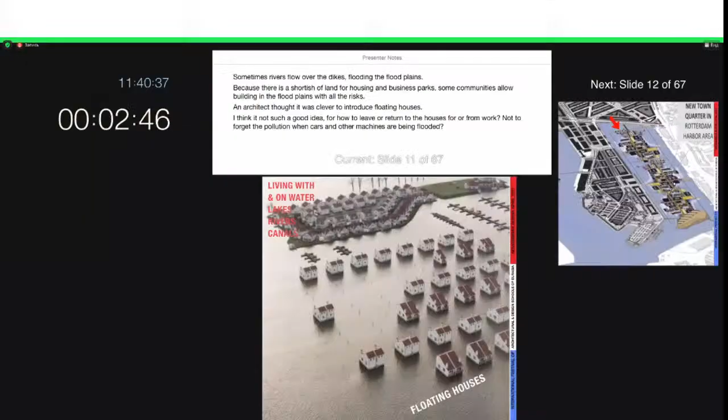They produce floating houses, as you see here below in the picture. I think it's not such a good idea for how to leave or return to the houses for work, and not to forget the pollution when cars and other machines are being flooded.

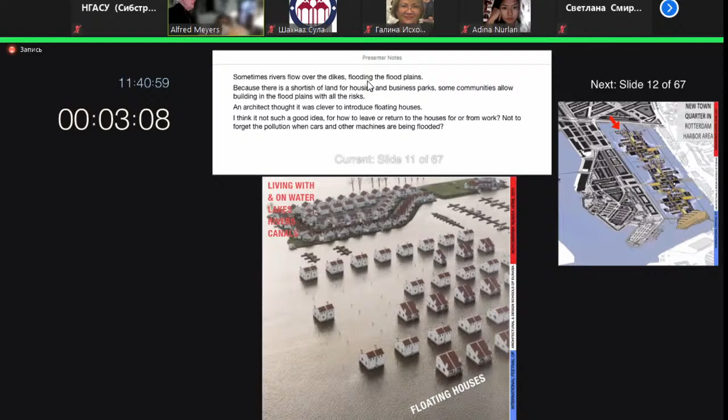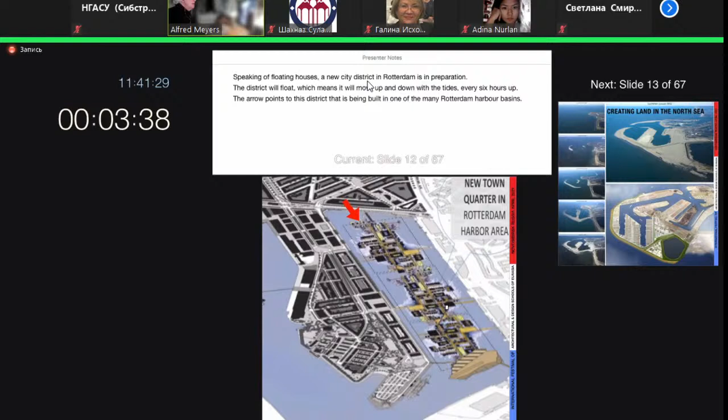Speaking of floating houses, in Rotterdam a new city district is in preparation. This district, about thousands of dwellings and offices, will float, which means it will move up and down with the tides every 6 hours. The arrow points to the district being built in one of the many Rotterdam harbor basins.

The port of Rotterdam was originally located in the center of the city. But because of air pollution and the growing size of cargo ships, the port was moved to the North Sea. New land had to be withdrawn from it, and see the result here. Once people said, God shaped the world, but the Dutch the land.

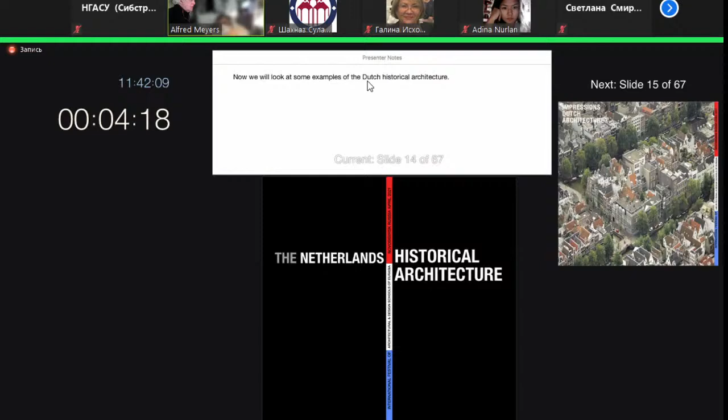Now we look for some examples of Dutch historical architecture. Amsterdam city nowadays is an open-air museum because the Amsterdam Canal District is on UNESCO's World Heritage List. These old buildings date from the 17th and 18th century, when the Dutch were a world power and became very, very rich. These dwellings were built by rich merchants.

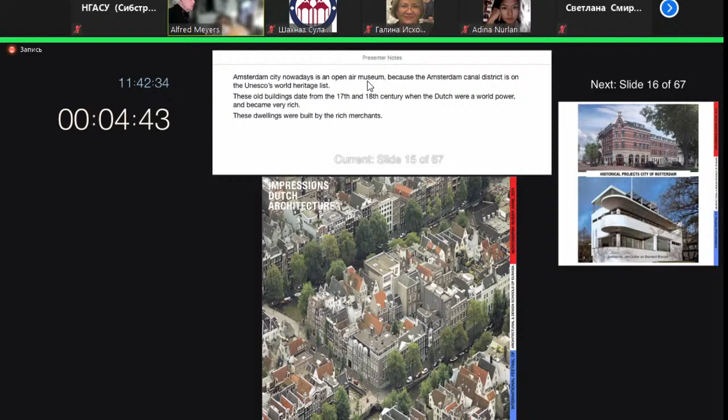Both buildings are in Rotterdam, built in 1938. Between those preceding projects came the famous Amsterdam School architecture.

Amsterdam School architecture delivered in the 1920s, the high-quality social housing project in the Spaarndammerbuurt in Amsterdam.

For that period, these were excellent dwellings for poor workers, small but full of comfort compared to the devastating situation in other labor quarters at that time.

The facades are sculptures in brick, which makes Amsterdam School architecture so famous and admired. Remember, it was built around the 1920s as social housing stimulated by the Dutch government and local administrations.

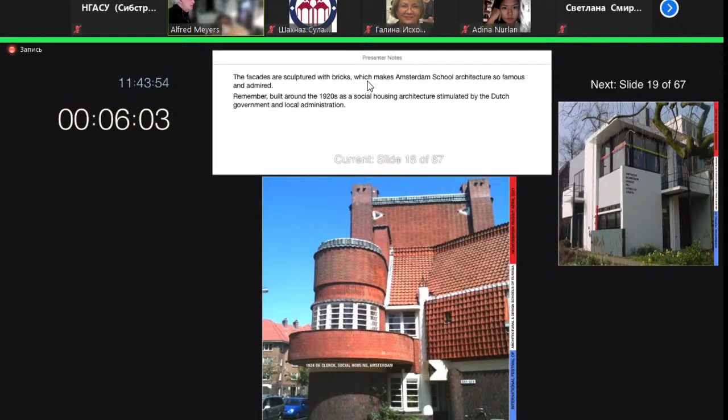Opposite to the Amsterdam School architectural style, a modern architecture was erected in Utrecht, which is, by the way, my place of birth. This is the world-famous Rietveld Schröder house, dated 1924, by the Dutch architect Gerrit Rietveld.

Yes, and then this: the Scheepvaarthuis in Amsterdam is one of my favorite architectural examples.

It was erected from 1913 until 1916. It's notable not only for its incredible sculptured masonry, but also for its very intelligent detailing.

After more than 100 years, the facade does not show any disturbing soiling, a quality many nowadays architects can only dream of.

The architect was an unknown young person, Jo van der Meij. Other Amsterdam School architects, Michel de Klerk and Piet Kramer, were recruited for this project.

In addition, a large group of artists contributed to the numerous decorations of both the exterior and interior of the building. At closer look, it seems like a deliberate approach.

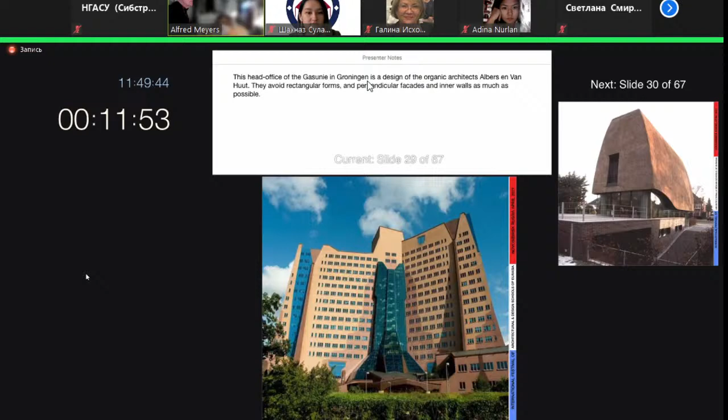The interior is very interesting and worth a visit when you are in the Netherlands.

Yet there are always quirky architects following their own architectural style. Here is one of many ecological designs, applying as many natural products and materials as possible along with low energy solutions.

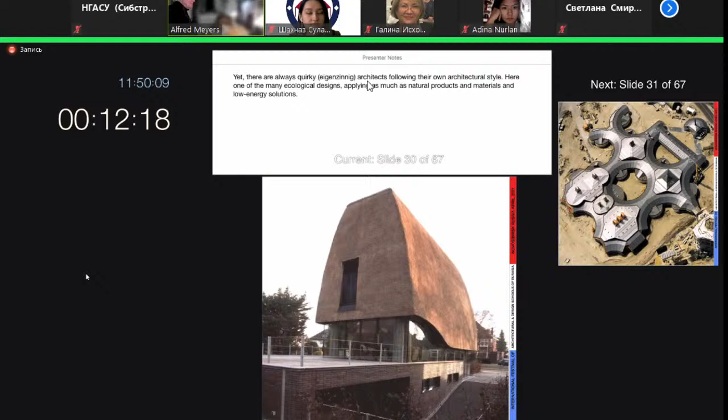And this is the head office of the European Space Organization, ESA-ESTEC, designed by the Dutch architect Aldo van Eyck.

I contributed to the project as a team member, and it was a very nice period working out the details of a project of this size.

Aldo was an architect who continued to design until the building was completed, working everything out to perfection. He designed many other interesting buildings as well, but it goes too far to show them all here.

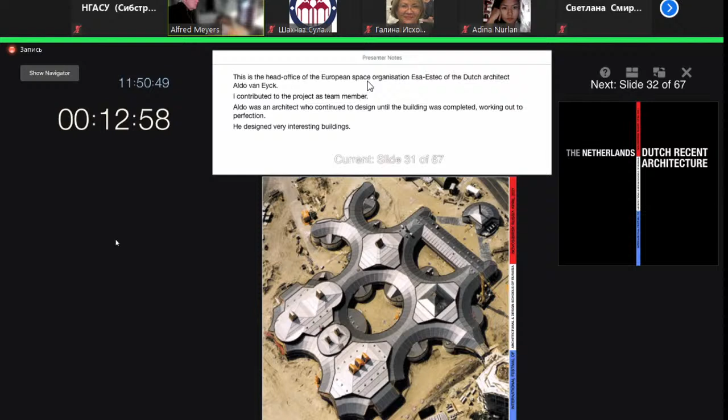Now some more common projects, examples of common housing architecture alongside more individual projects. The column on the left shows large projects, while those on the right are more individually developed projects.

Top right is an Amsterdam canal project of mine. Bottom right shows individual family housing projects where the client and the architect were not restricted by rules.

So every client has the opportunity to create his house in his own style.

Every 4 years, the city of Almere organizes competitions for extensions of city quarters scale. Developers and architects were asked to develop high-quality living environments as an experimental project. Left is a project, again, of Aldo van Eyck, mentioned before. The dwellings have very interesting floor plans, views, and better than the examples at the same quarter on the right.

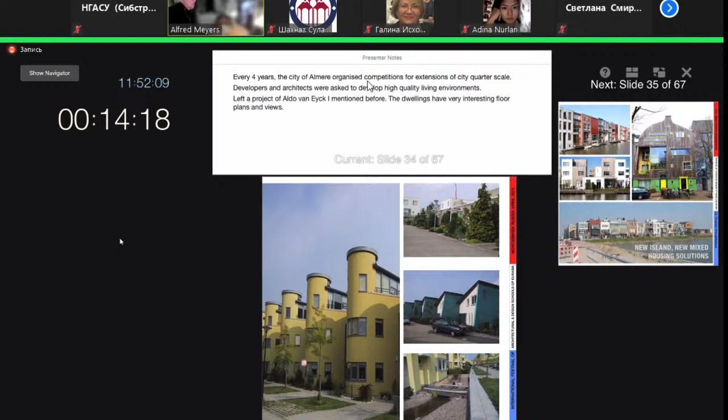IJburg is a newly created island taken from a former inland sea. It was allowed to erect designs to own taste. This resulted, however, in a mix of good and poor architecture, sometimes ending in messy street architecture as well. Not all the buildings fulfill the requirements for low energy and sustainability, unfortunately.

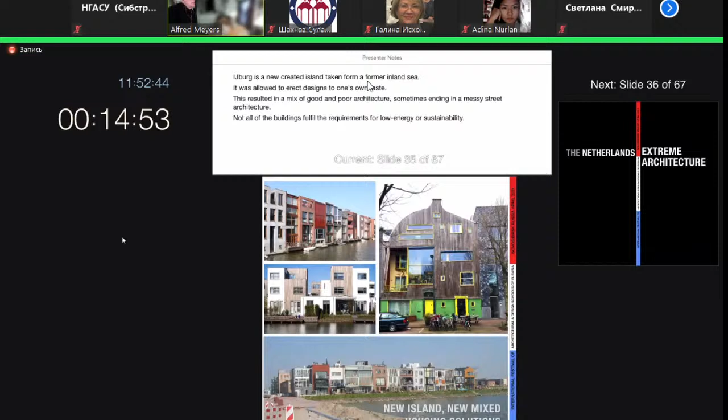Other architects have only one interest, and that is to be noticed. This is an extension archive building of Rotterdam Museum. The architects are MVRDV. I think you will know the office. It's a bowl of which the facade is cladded with reflective panels. You can see the woman walking below, showing the scale of the building is huge.

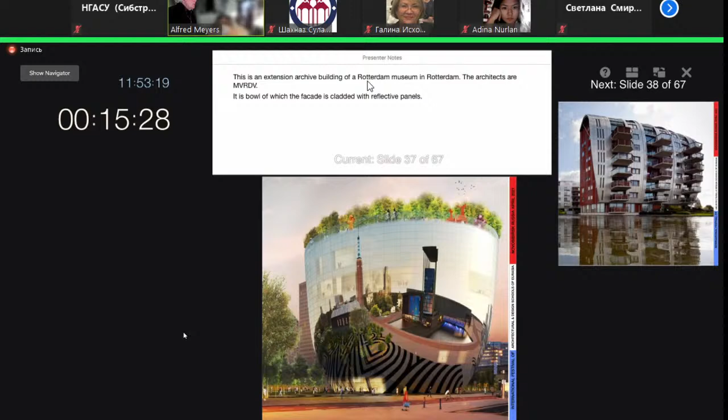A row of luxury apartment buildings in Den Bosch with zinc and masonry facades.

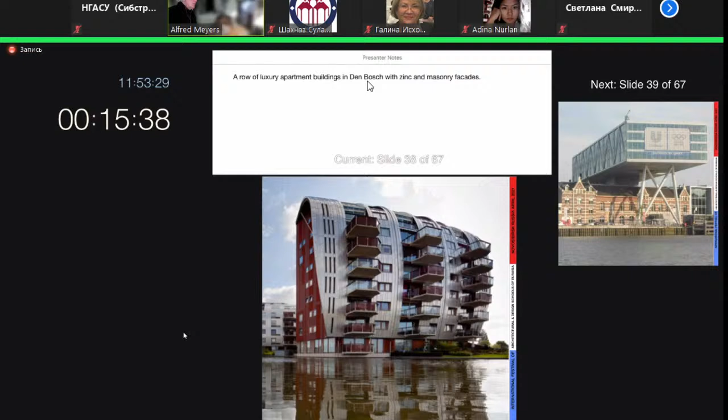It is a difficult discussion going on in the Netherlands and surrounding countries. Some architects are looking for attention and design this kind of devastating solution that brings even a historical building down to a tiny volume. I don't know what you think of it, but I think it is awful what's happening here. It's not the quality of architecture one might hope for.

A mad hotel in Zaandam, by architect Soeters, who is one of the architects who follows his own style. Is this fun or just crazy? It is a nice building because these old tiny houses that make up this huge hotel building are in the old style of historical wooden houses that were built in Zaandam and surroundings.

Extreme does not always mean integration into the urban spatial quality as well. This is another MVRDV project, for a cultural center in The Hague. That's such an example. It has a similar offensive character to some official buildings characteristic of Soviet architecture. I mean with this that I have good feelings about Russian and Soviet architecture, so don't be angry with me, but this is really an offensive building.

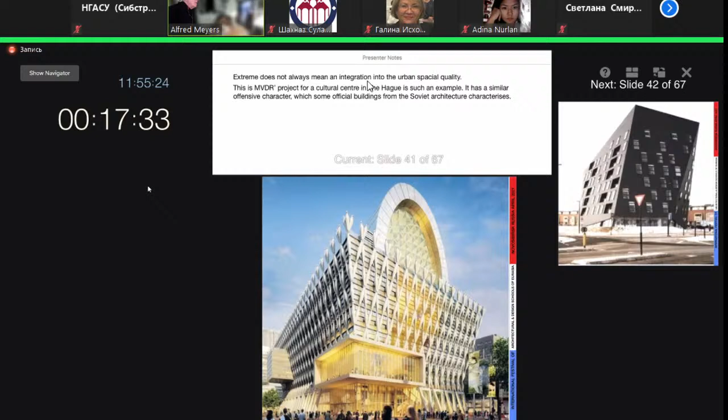And then, how is it to live with sloped inner walls when you're as tall as I am? I'm almost two meters high. And what's he doing here? Asking to be noticed?

This is a very interesting project, however, designed by Austrian architects. This is the EYE building, a cinema and movie museum at the IJ in Amsterdam. The interior is of high quality, and it is a huge project. And it looks like a whale, doesn't it?

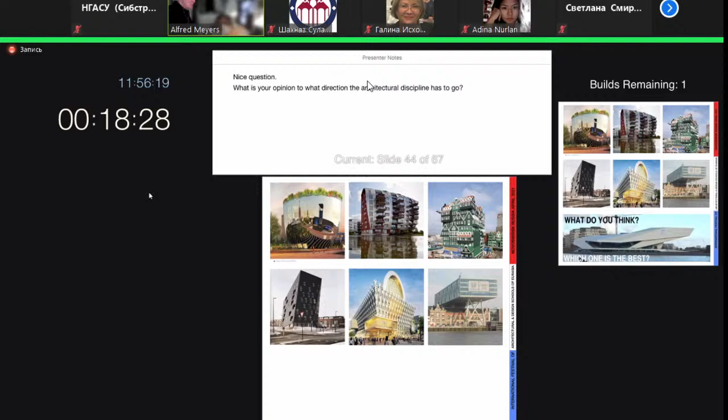And then the next question: what's your opinion on what direction the architecture discipline has to go? This way? And what do you think? You can make up your mind yourself.

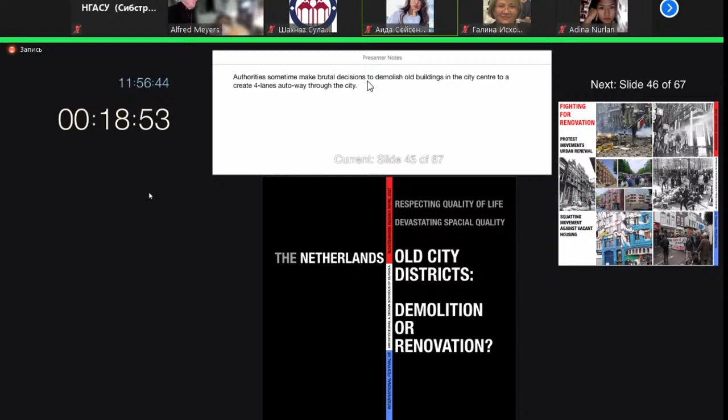Authorities sometimes make brutal decisions to demolish old buildings in a city center to create a 4-lane autoway through the city. Not in Amsterdam. In the 70s, old and young demonstrators protested to avoid this measure. Squatting movements were organized to end the vacancy of many buildings at a time of lack of housing possibilities, especially for young families. Finally, they won the street war with success. Many social housing projects of a human scale have been erected since then, while old buildings were transformed or renovated into social housing as well.

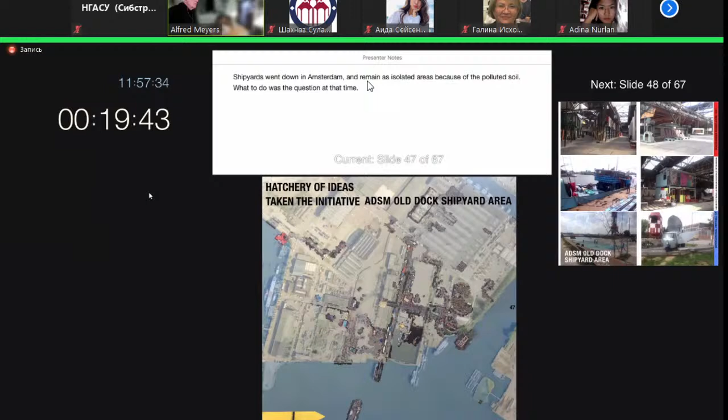Shipyards went down in Amsterdam and remained as isolated areas because of the polluted soil. What to do was the question at that time. The first dwellers were fine artists and sculptors, building their own workplaces within the old halls and other structures of the site. The remains of the shipyard became part of events, and in open areas arose sustainable restaurants built with remains from the demolition of other buildings. The site became very, very popular to visit and enjoy all kinds of festivals and restaurants.

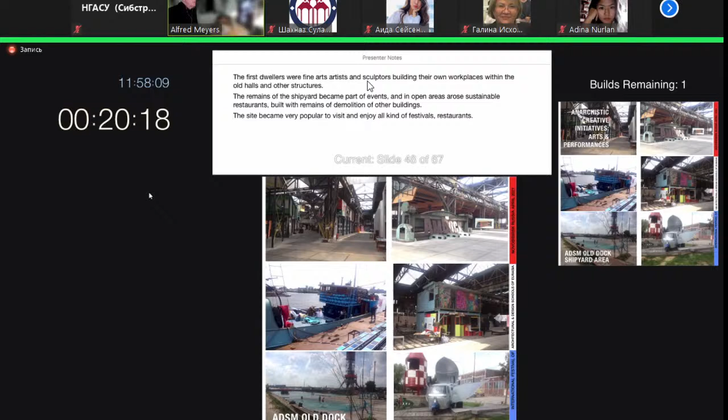Other polluted areas became occupied also by young people with the intention to purify the soil using plants. One of these initiatives is the Ceuvel in Amsterdam, an experiment with permission of the municipality. Meanwhile, the plants did their job, and the soiling became less and less. The poisoning was so severe at the beginning that it was necessary to build raised walkways and boats on dry land to live in.

Thinking about urbanization is growing in our profession and society. City heat is a problem that occurs with compact built city centers with hard finishes for streets and squares. For people, it is not quite a healthy environment.

The interest in greenery in urban environments becomes increasingly important in the Netherlands and in Europe as well. See the difference when an existing city quarter is changed into a green environment for recreation and local agricultural areas.

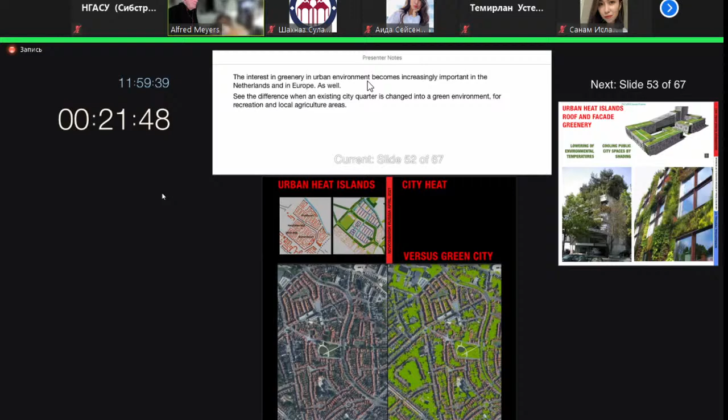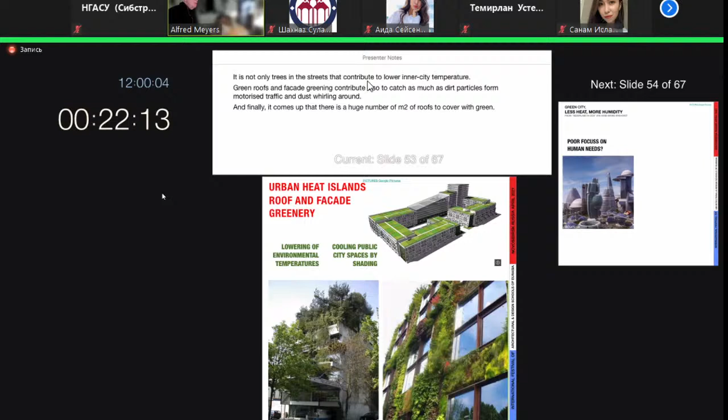It's not only trees in the streets that contribute to lower inner city temperature. Green roofs and facade greening also contribute, catching dirt particles from motorized traffic and dust whirling around. And finally, it comes up that there is a huge number of square meters of roofs to cover with green.

Urbanization delivers a huge problem. How to manage a livable environment for humans when cities become populated with over 20 million citizens? And which one of the two do you prefer to live in? That's the question.

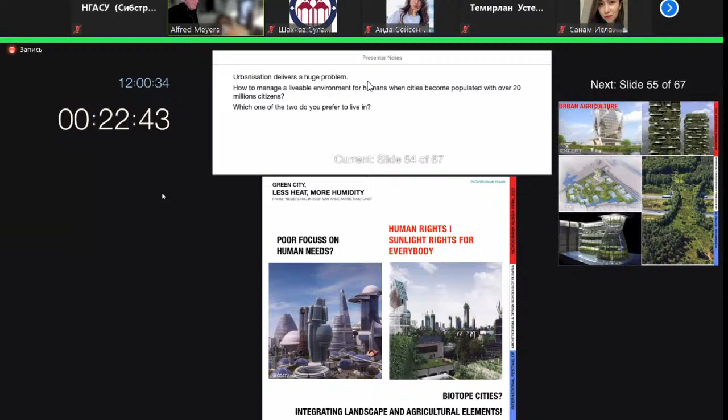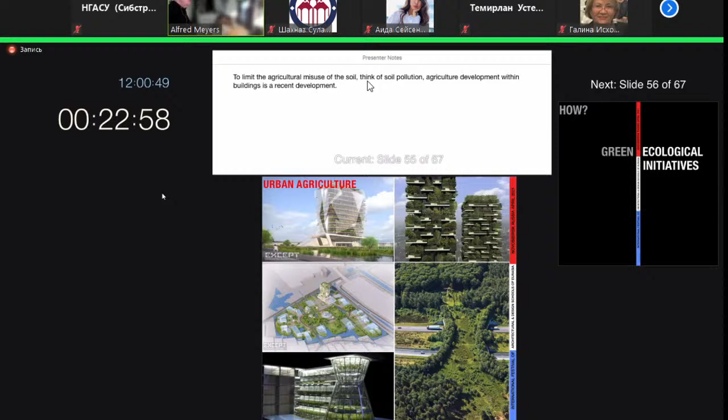To limit agricultural misuse of the soil, especially here in the Netherlands, think of the soil pollution. Agricultural development within buildings is a recent development. This is a recently developed area in Amsterdam. Remark, the buildings here are apartment buildings, not quite a pleasant street quality.

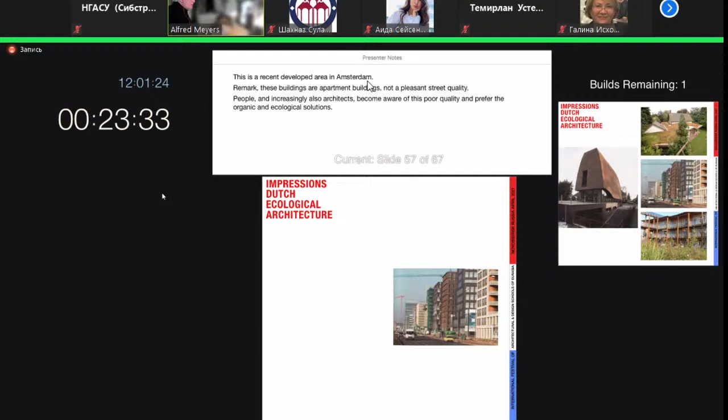And I know what I'm talking about because I'm living nearby. People, and increasingly also architects, become aware of the poor quality and prefer the organic and ecological solutions, as you can see in the other pictures.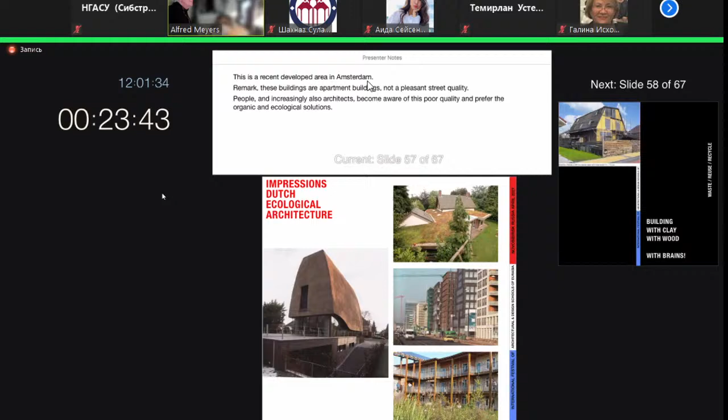And this goes without saying. The problem, however, is the large scale of urban development. And now, since not long ago, it is even possible to erect high-rise buildings from wood constructions. So there is still hope.

However, citizens in many cities claim the streets back, occupying parking lots for greenery or using them as a terrace.

And on a bigger scale, experimental projects all over the Netherlands focus on energy zero, waste reuse, and wastewater reuse issues. The project here is called the Living Machine, in which a halophyte water basin purifies wastewater. From urine, phosphates are being extracted for improving the soil in a vegetable garden. Waste and other rest materials in a biomass installation produce gas for the dwellers.

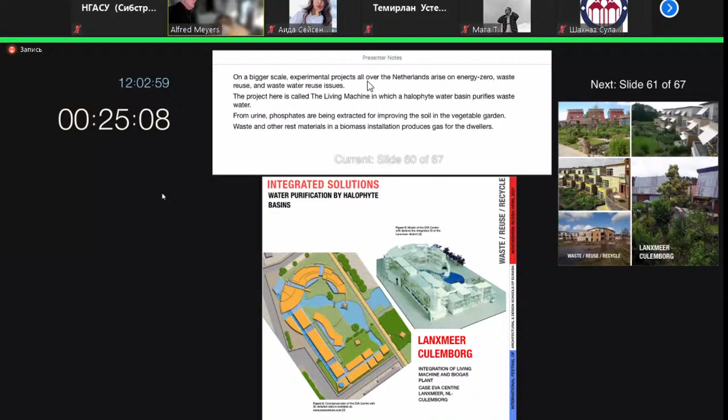This site is almost self-supporting, autarkic. Timber constructions and green gardens and playgrounds for children with ponds create a wonderful and human-friendly living surroundings.

And I think that's a pity, but when we have cities of 20 million inhabitants, then you can ask whether these kinds of projects are useful or possible.

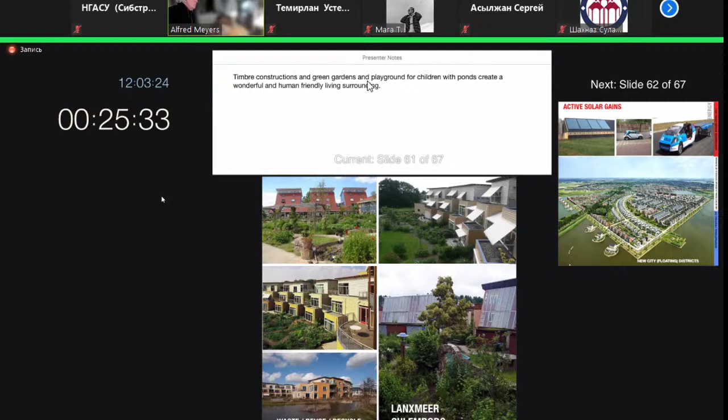On energy issues, of course, photovoltaic cells and solar boilers are the most common energy-reducing techniques. Here is an example of a Dutch concept design, and again it is for a floating peninsula.

The urban planning orientation is based on the optimum solar gain objectives. Architecture and urban planning with maximum solar energy gains, and it is then very profitable for all the dwellers.

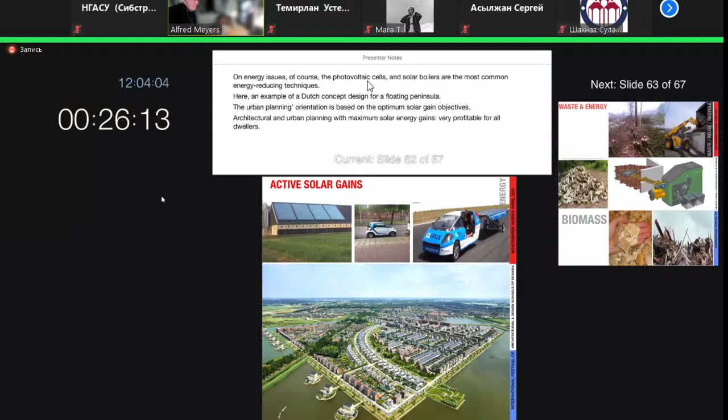However, heating with wood is not that sustainable in the end. Biomass production is still in progress. The discussion now is whether heat and cold storage deep in the soil is a better alternative, but it is a very expensive way to reduce energy consumption.

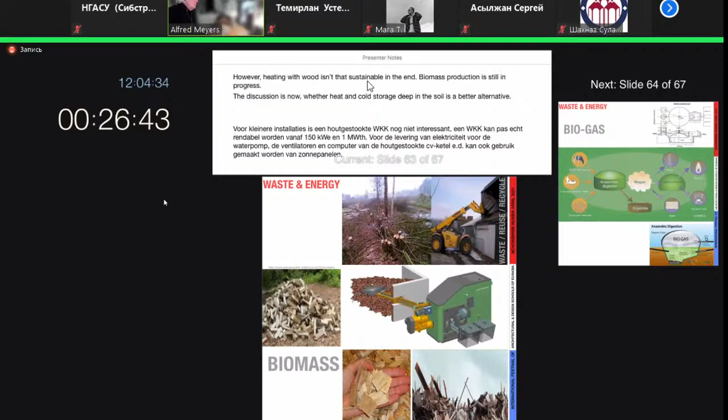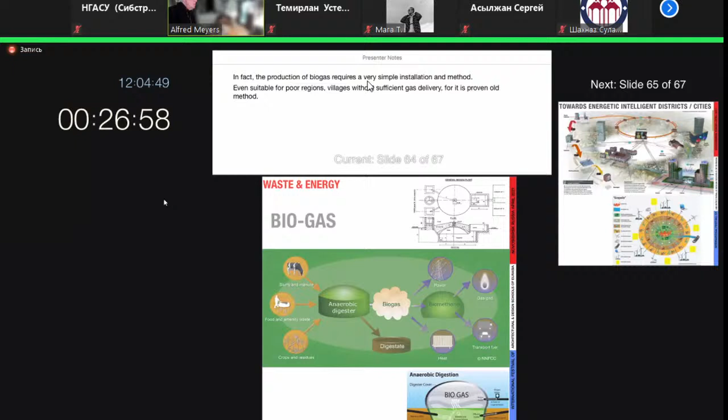In fact, the production of biogas requires a very simple installation and method, even suitable for poor regions, villages without sufficient gas delivery, as a proven old method.

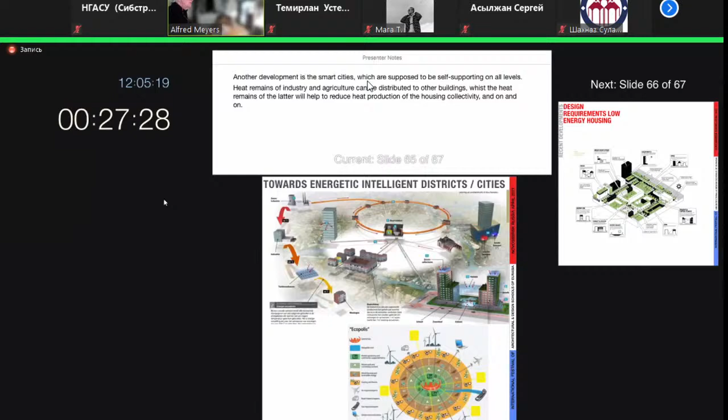Another development is the smart cities, which are supposed to be self-supporting on all levels. Heat remains of industry and agriculture can be distributed to other buildings, whilst the heat remains of the latter will help to reduce the heat production of the housing collectivity, and on it goes.

Architectural education should take the requirements for zero energy development into account. Here is a survey of the main aspects that deserve much attention to improve the quality of the built environment.

Human-oriented design must always be in focus for architects and urban planners when designing. And one of the first necessities is the right of sunlight, essential for healthy dwellings since sunlight kills bad species.

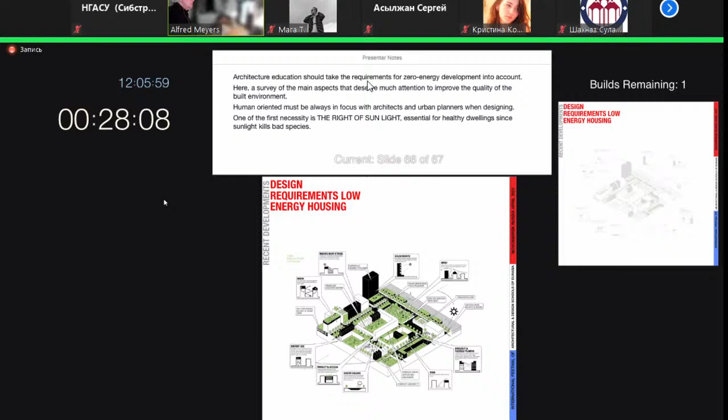So that was my presentation for now. I hope it was interesting for you, and thank you for your attention.